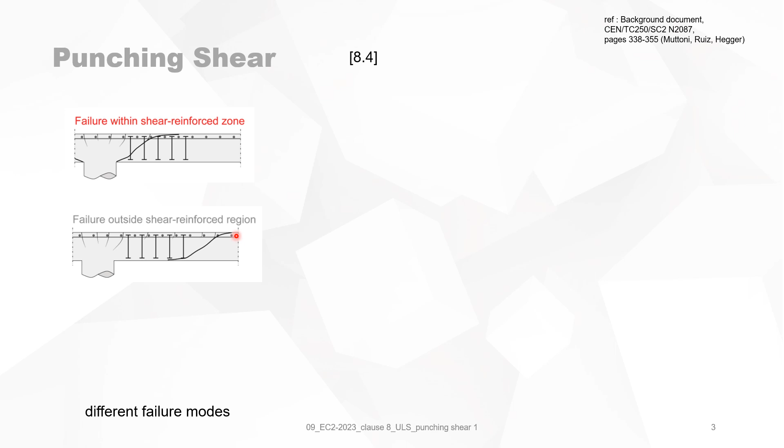Concerning punching shear, there are different failure modes, and the first failure mode is failure within the shear reinforcement zone. So this is the shear crack, and this is the shear reinforcement. The second one is a failure outside the zone of the shear reinforcement, like it is indicated here. And a third one is failure by crushing of concrete struts.

Let's take now a closer look at the failure mechanisms. On the x-axis, you have the rotation ψ, which is mentioned here. That's the angle. And we have the total force V. When you increase V and you measure the rotation, you will have a load rotation relationship, which is this one.

Now you need a failure criterion, but for punching you have different failure criteria. The first one is, for instance, a failure criterion mentioned here for members without punching reinforcement. The blue one is a failure criterion for concrete crushing, like we've seen here. The gray one is a failure criterion outside the shear reinforced region. And the red one is the failure criterion within the shear reinforcement zone, as mentioned here. So you have different criteria for a certain load rotation relationship.

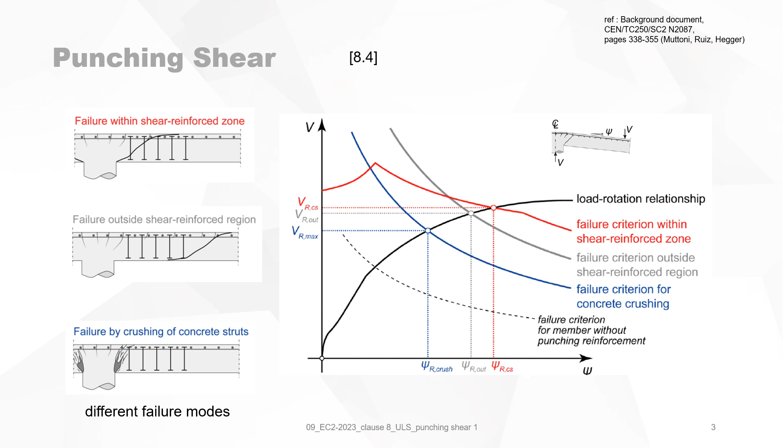We look at the same graph with the load rotation relationship, and then we will see the failure criterion of concrete contribution is the blue one. This is where VRc, the contribution of the concrete only with its rotation, is mentioned.

Looking at the failure criterion for punching failures within the shear reinforcement region, that was the red curve, you will see that at a certain load VE, when you hit the load rotation relationship, one part of the resistance will be given by the reinforcement, and another part will be given by the resistance of the concrete only. You will see now in this failure criterion there is a portion where the shear reinforcement is not yielding, and a portion where the shear reinforcement is yielding. So it's a quite complex behavior.

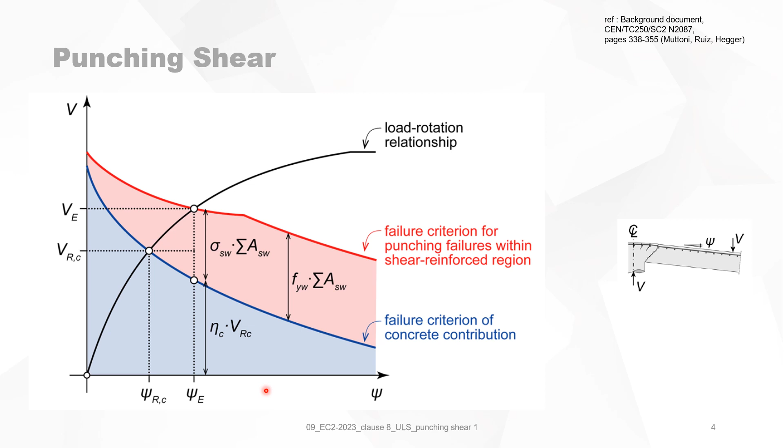Detailed verification of the punching shear resistance may be omitted, provided that at control perimeter b0.5 formula 8.87 is valid. This is new. So they say that for punching shear, you should not bother when the shear stress is less than a certain minimum value, which is a contribution of the concrete only, τRd,c,min. No punching shear reinforcement is required in regions at the control perimeter b0.5 when the shear force is smaller or equal to the shear force as a contribution of the concrete.

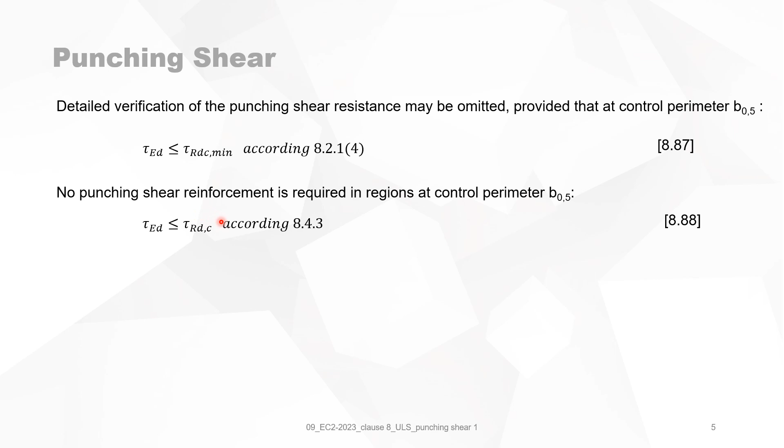Punching shear reinforcement must be provided in such a way that the shear stress is smaller than the maximum allowable shear stress. This is crushing of the concrete struts. And the applied shear stress must be smaller than the one provided by the shear reinforcement. Those three last lines are more or less the same principle as applied in the Eurocode 2 version 2004. The first one is new.

The big difference is that now the first control perimeter is b0.5, which is the control perimeter at a distance half the effective depth of the slab. In version 2004, it was 2 times the effective depth of the slab. So that's a big difference. The Eurocode 2 version 2023 talks about a control perimeter b0.5 for each step. That's important. We will come back to that a little bit later.

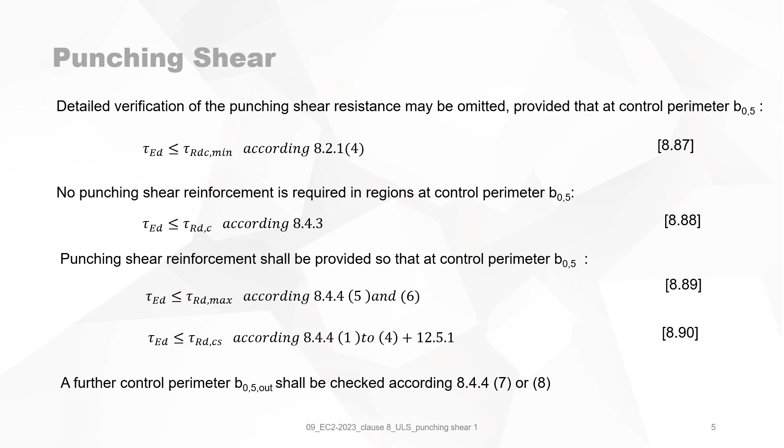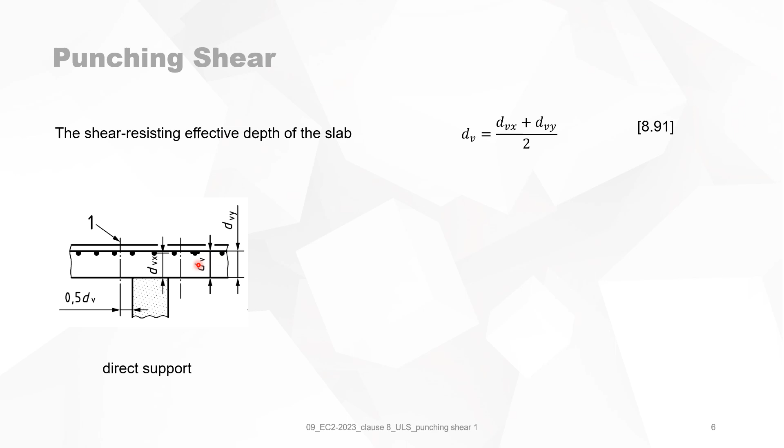The shear resisting effective depth of the slab, dv, which is a new concept, is the mean value of the depth in the x direction and the depth in the y direction. For a direct support, you will see that one is the control section. It's at a distance 0.5 the effective depth. Then you have the effective depth in the y direction and the effective depth in the x direction. You take the mean and you have the shear resisting effective depth.

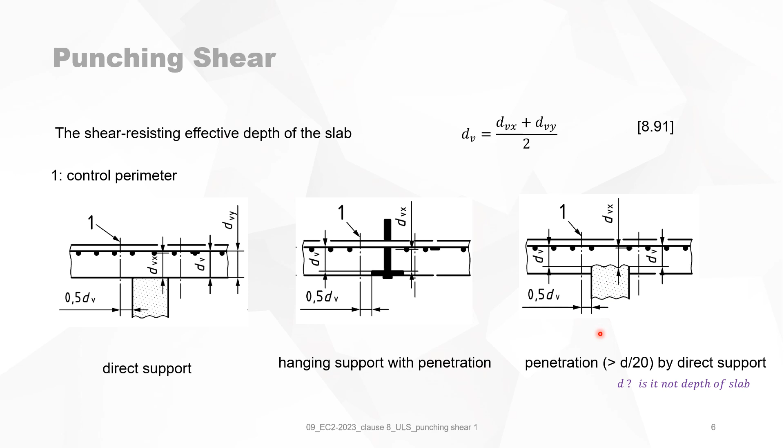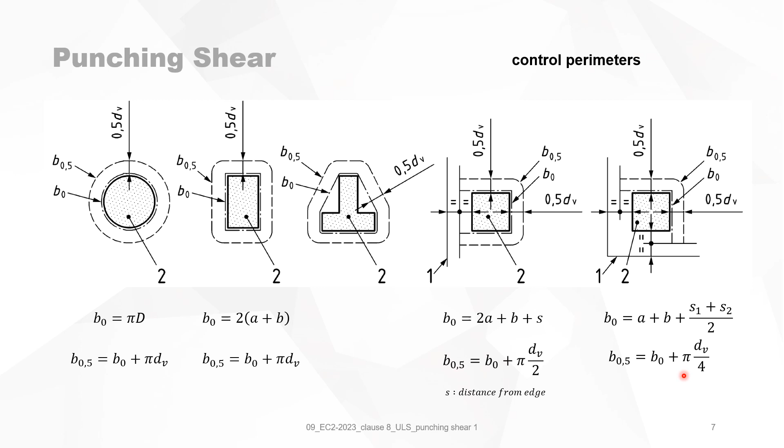For the corner column, you have two distances from the edge, s1 and s2. Then b0 is given by this formula and b0.5 by this formula, with s1 and s2, of course, the distances to the edge of the slab. Now, what is nice to notice is that for an internal column, b0.5 is always b0 plus π times dv. For an edge column, b0.5 is always b0 plus π dv divided by 2. And for the corner column, it is divided by 4. So that's nice to notice.

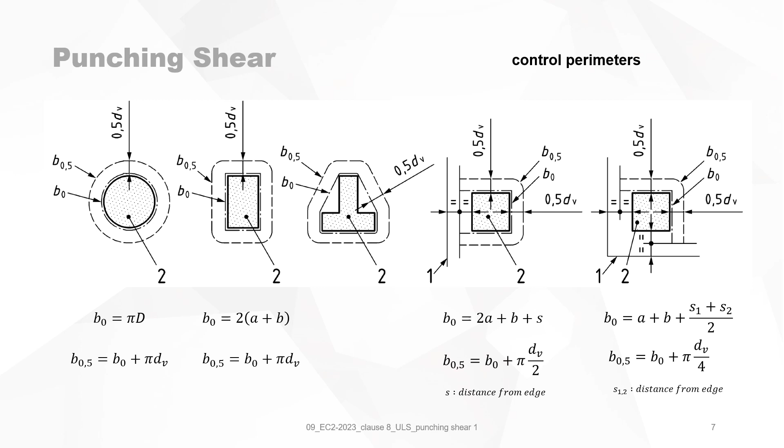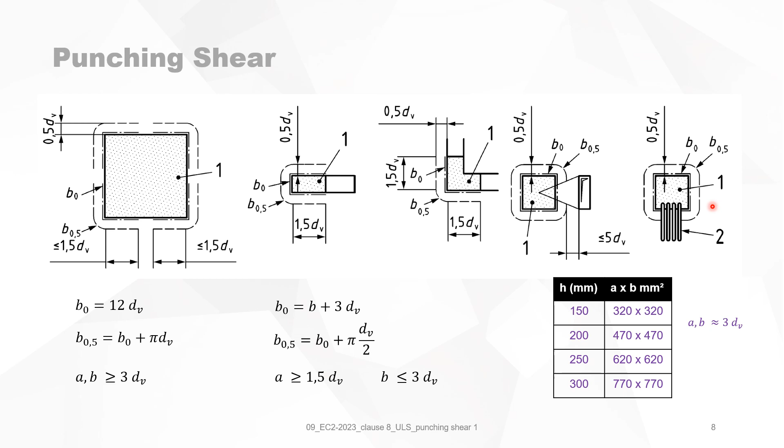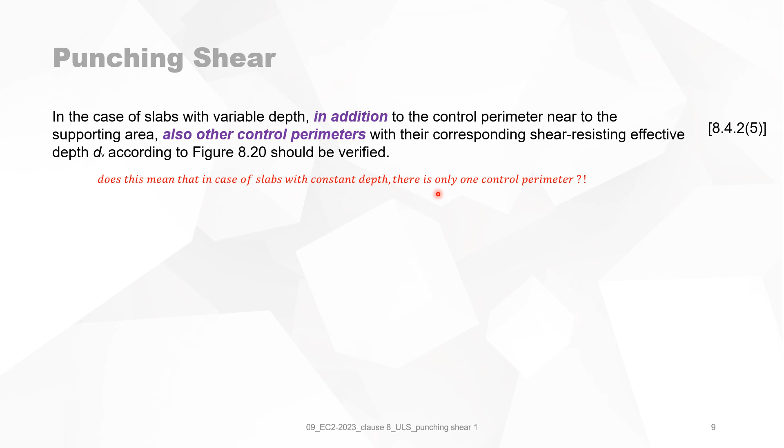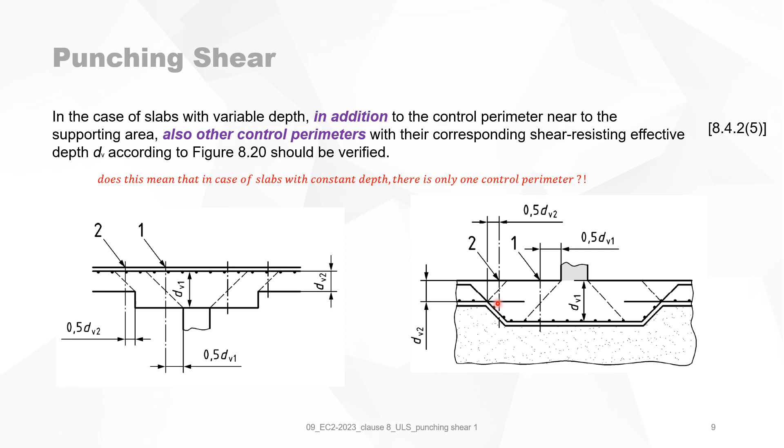So with a variable depth, you see that this is control perimeter 1 at 0.5 dv. It means that the struts are supposed to be at 45 degrees and not something like 21 or 22 degrees when the angle is 1/2 with the version of Eurocode 2004. So you apply the same principle for the different slab depths. You will also see here the control perimeter at 0.5 dv. For a foundation, it's just the same principle. 1 is the control perimeter, and then you have it at 0.5 dv. And then for dv2, you have also control perimeter 2.